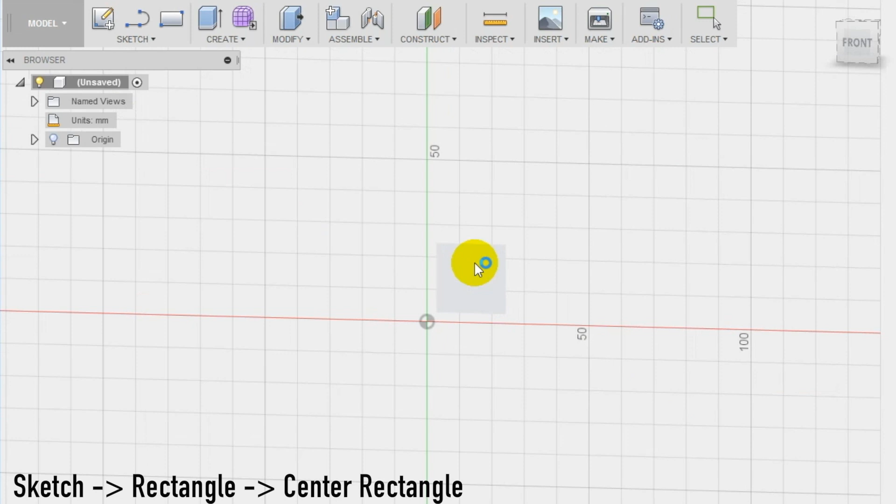Step 1. Creating the base of the hoop. Start a new sketch on the front plane and using the rectangle tool, draw a rectangle of 40 mm by 60. This rectangle represents the backboard. Select now the extrude tool and add 2 mm of thickness.

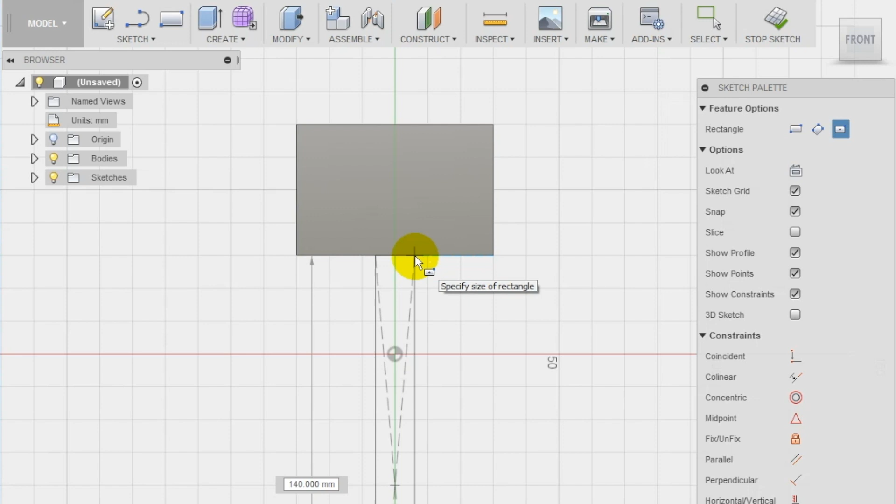Start now another sketch on the front plane and using again the rectangle tool, draw a second rectangle which represents the pole that holds the backboard. Make sure to align the symmetry line of this second rectangle with the first one to create a balanced structure. Use the Sketch Dimension to set some distances, and then extrude the rectangle with the same settings we used for the first.

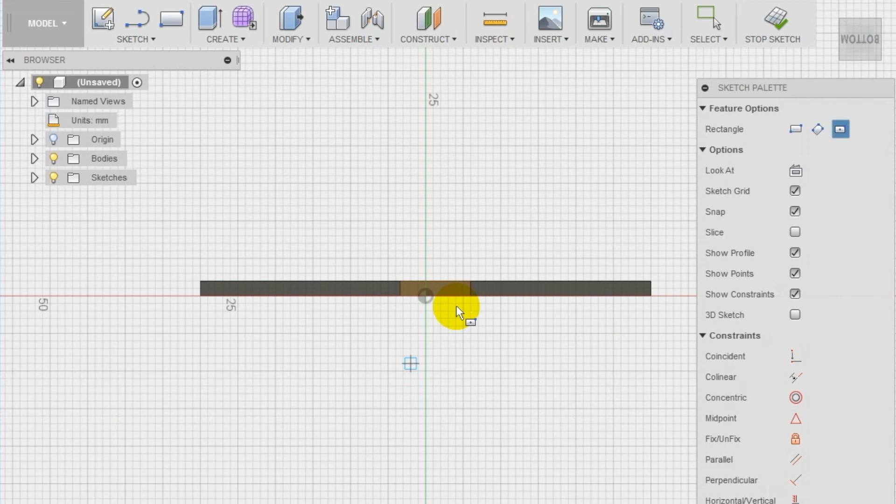Select once again the rectangle tool and draw a third rectangle on the bottom surface of the second one. Keep in mind that every flat surface can be used as a plane to start a new sketch and apply new functions. Make this rectangle 40 mm by 80, which is a good dimension to guarantee stability to the structure. Then extrude this sketch too, but this time make it thicker to have more stability.

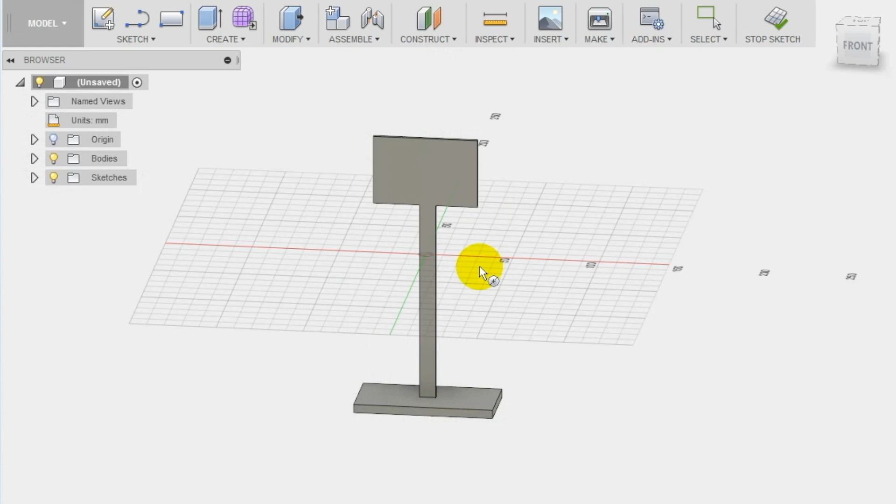Step 2. Creating the hoop. Select the torus tool in the Create section of the top menu now to create the hoop. Draw the torus on the top plane. Don't worry if it's not the correct position, we will fix it afterwards. Draw the center of the torus aligned with the symmetry line of the structure and draw a 30 mm diameter circle. Use the setting box to make the torus diameter 3 mm and set the operation to New Body.

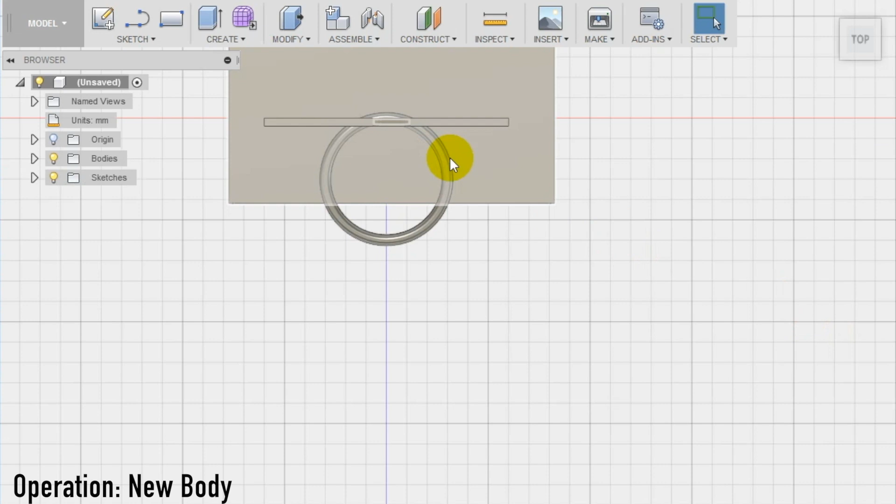Use the Move tool now to move the hoop in the correct position. Move it up using the adjusting arrows and then make sure to connect it with the backboard.

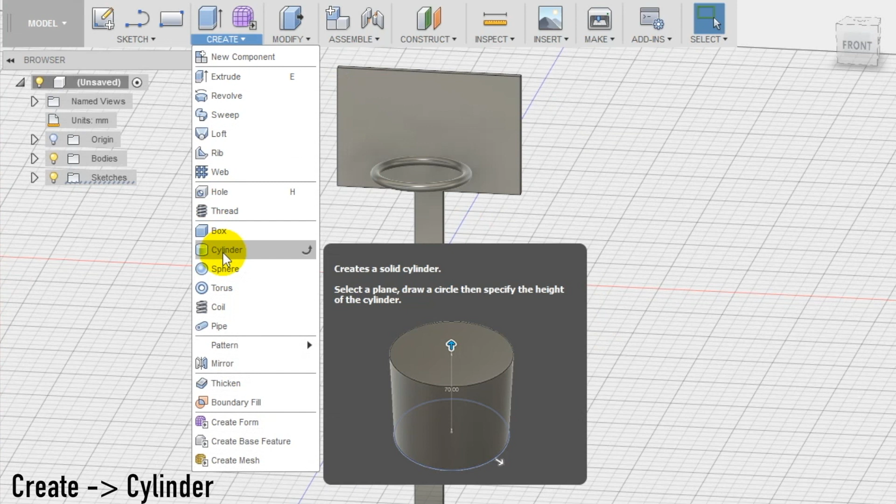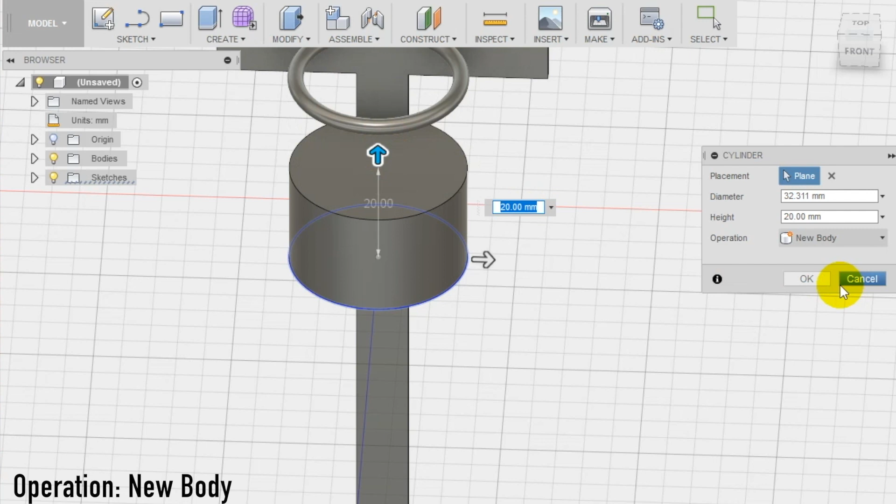Step 3. Creating the net. To create the net now, we're going to use a cylinder from the Create section of the top menu. Draw the cylinder on the top plane like we did with the torus, and make the diameter of the cylinder coincident with the external edge of the torus. Make sure that the center of the cylinder and the torus are aligned. Make the cylinder 20 mm high, and once again set the operation New Body. Move now up the cylinder and merge it with the torus using the Move tool.

Create now a second cylinder on the top surface of the first one. This time, make the diameter exactly like the inner edge of the torus. Make the cylinder go through the volume of the first one and make sure to set the operation to cut to create the net.

Step 4. Creating the basketball. To create the basketball, select the Sphere tool in the Create section of the top menu and draw a 20 mm diameter sphere on the front plane.

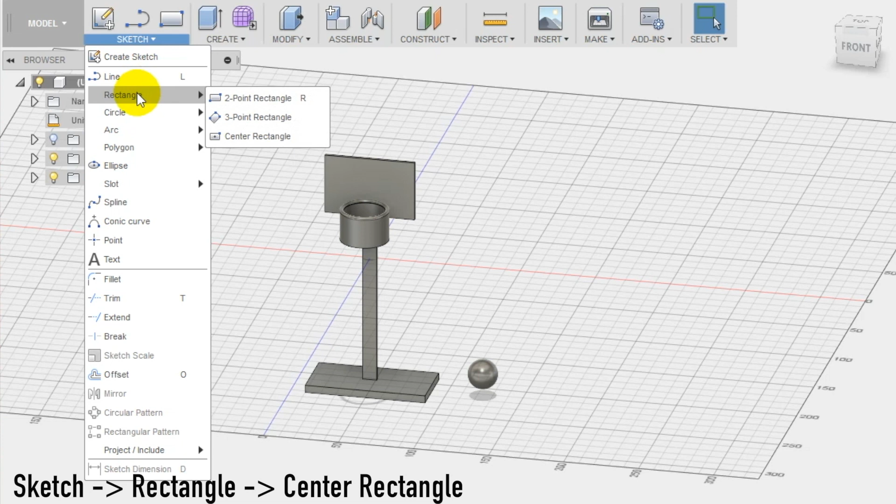Step 5. Creating the catapult. Start a new sketch on the top plane and using again the rectangle tool, we start creating the catapult to shoot the ball. Draw a 40 by 60 mm rectangle and add 2 mm of thickness using the Extrude tool in the Create section of the top menu. If you didn't draw the base of the catapult aligned with the symmetry line, use the Move tool to move the base and put it in a better position.

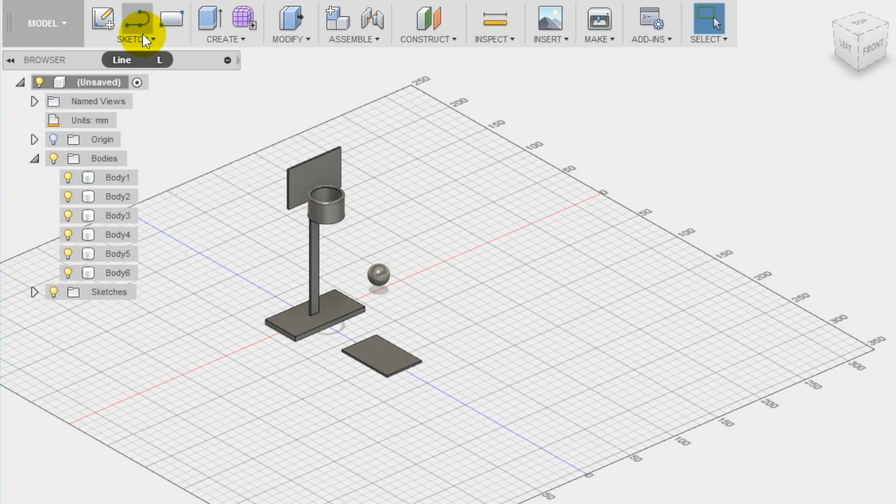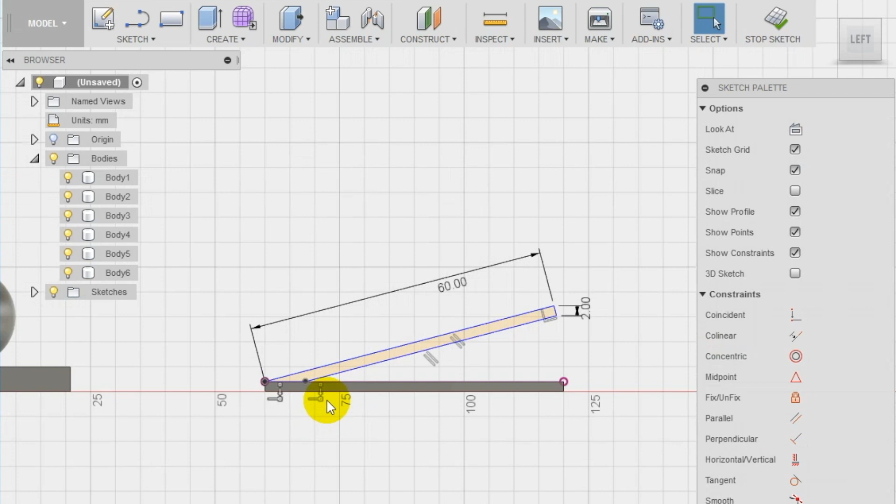Start a new sketch now on the side plane and using the Line tool, draw an oblique rectangle. Make sure to connect the bottom with the base of the catapult. Use the Sketch Dimension to make it 60 mm long and 2 mm thick. Then extrude it, setting the direction at two sides and the distance on each side at 10 mm.

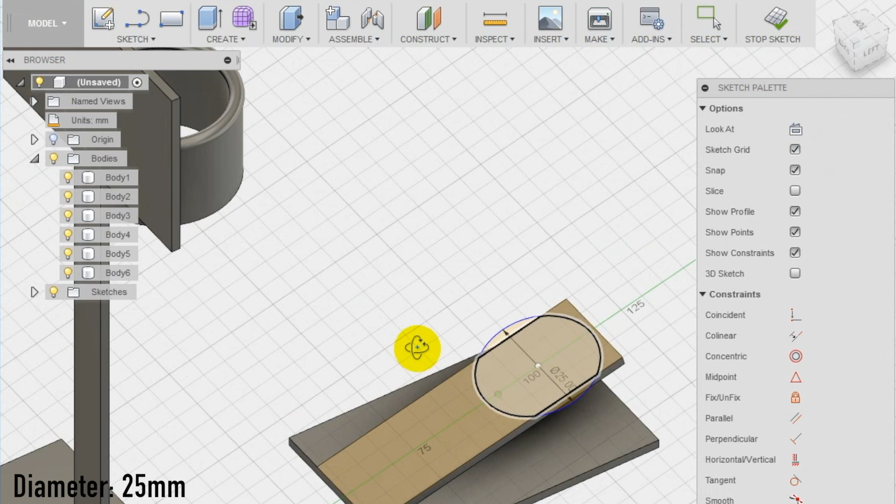Draw a circle now on the oblique surface. In this way, we are going to create a base for the basketball. Make the circle 25 mm in diameter and extrude it on both sides, adding 1 mm on one side and 2 mm on the other.

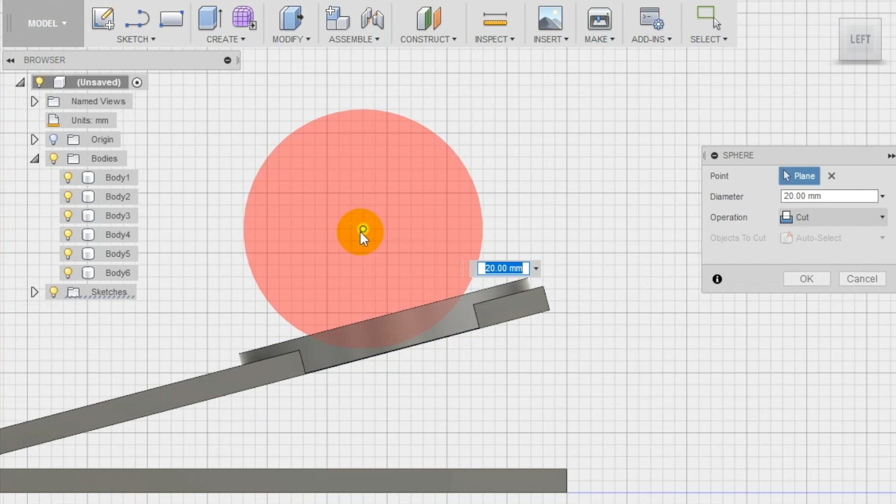Start a new sketch on the side plane now and draw a sphere using the sphere shape in the Create section of the top menu. Make sure that the sphere is 20 mm in diameter and it cuts away a slice of the catapult base. In this way, the basketball has a place to stand on the catapult.

Step 6. Saving and exporting your STL file. Save your project in Autodesk Fusion 360 Cloud as Table Basketball. Then right-click on the new name at the top of the left menu and select Save as STL to export your file for 3D printing.

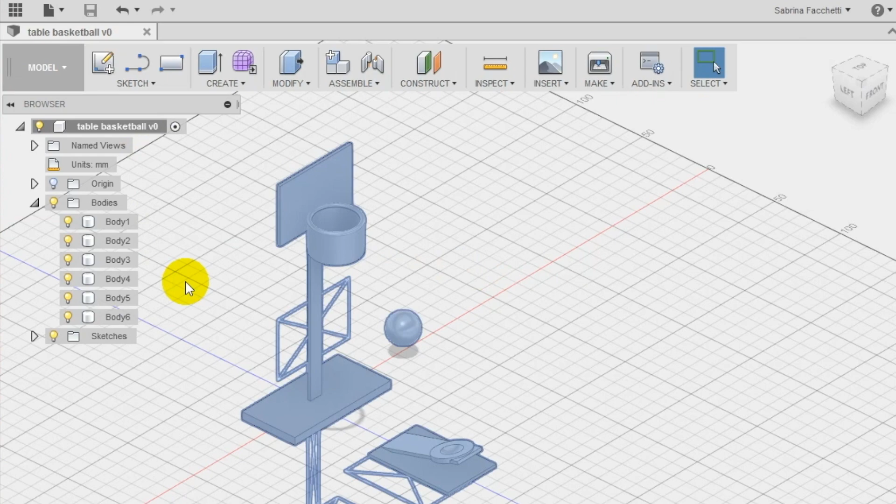Thanks guys for watching my class. Now that you have your own basketball set, you can play with your friends wherever you want.